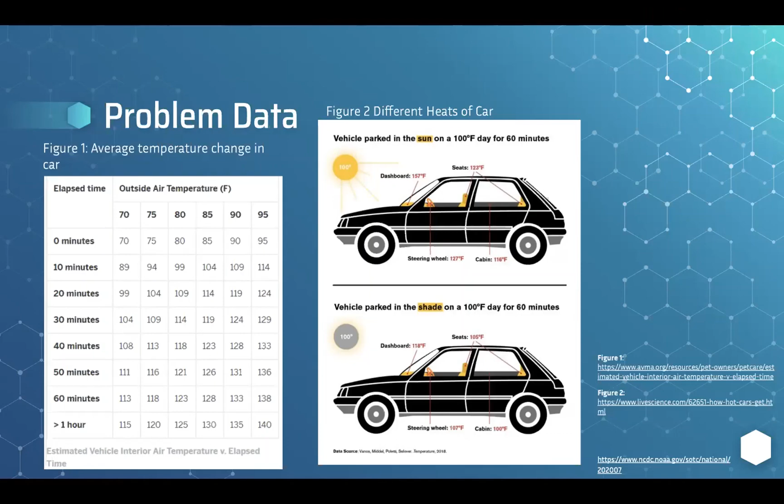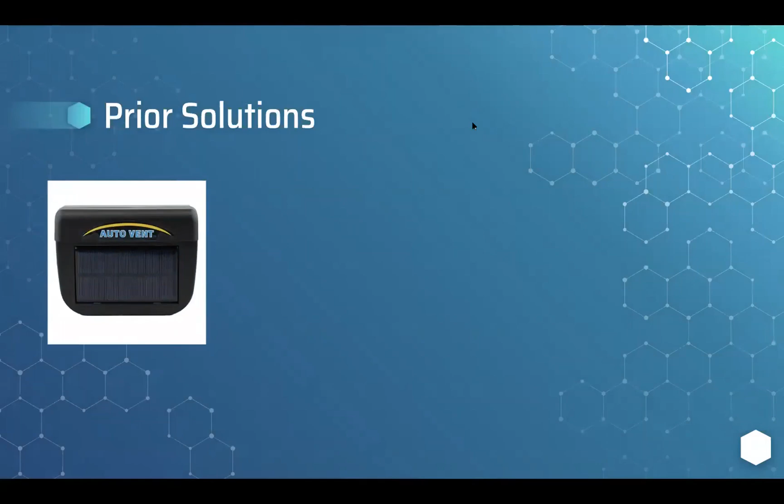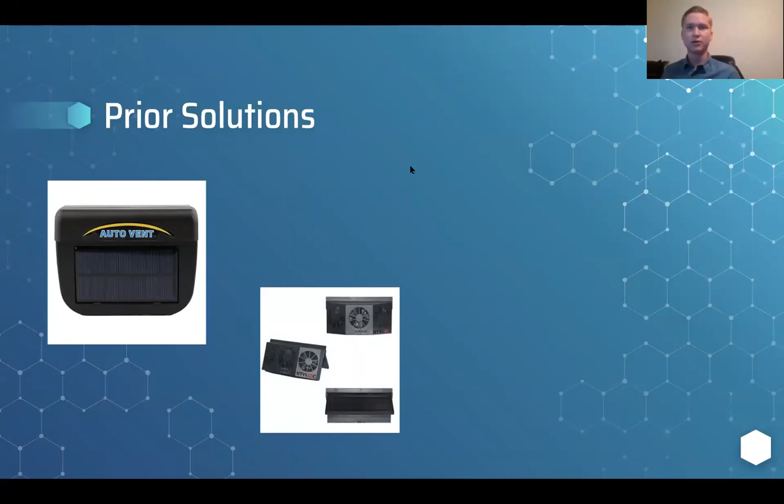These are some of the solutions we could find. The AutoVent is a solar-powered fan that you can hang from the window, meaning that you have to leave the window cracked, which could lead to someone breaking into your car. And also the fans were not powerful enough to actually cool the car down. Similar to this product is the USB powered car ventilator. This device also has the same problem. The car cannot get cooled down enough, even with the 3 fans. And you also have to leave the window cracked as well.

The Sunshade is a pretty good product to keep the sun out of the car, but the problem is it only blocks the sun from the front of the car, not the side or the back, meaning that the sides of your car can still heat up. The Lombo is a great product that works really well, easy to set up, and it keeps the car cool, but it's around $400, so it's not very affordable, and it's also not very convenient to take to work.

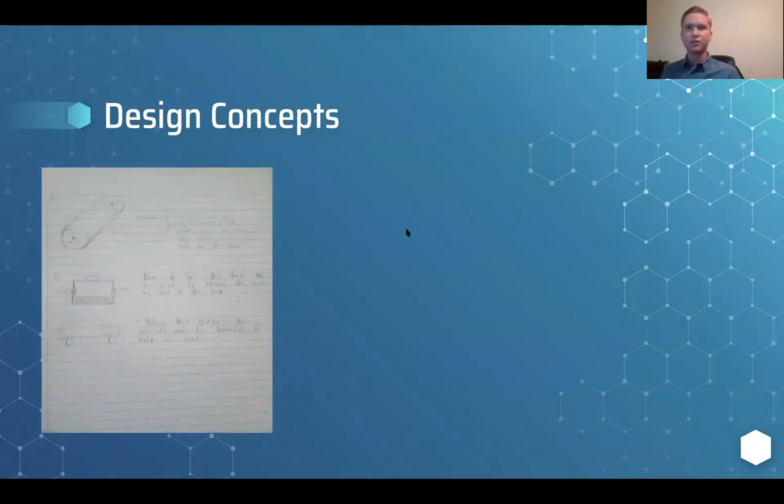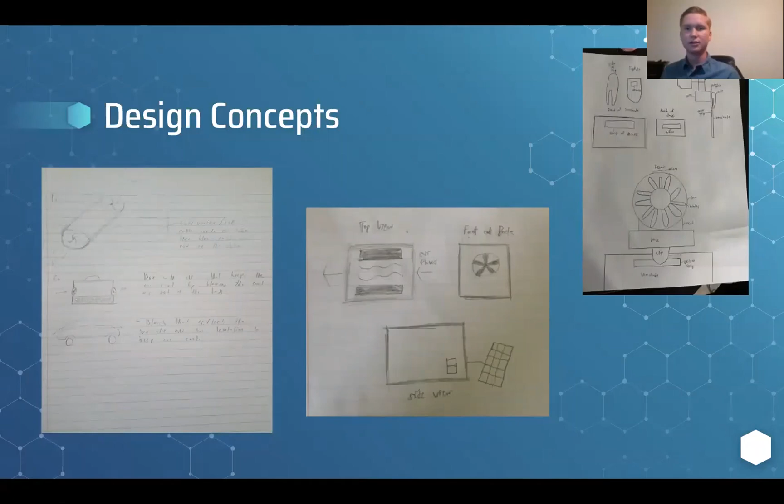We decided that the tube fan design was the best idea. The design has 2 tubes, one that is bigger and is made out of 4-inch PVC pipe, and one that is smaller and is made out of 1.5-inch aluminum pipe. The design has 2 fans, one that blows air into the tube and one that blows air out of the tube. There is a gap between the tubes in order to keep the gel packs inside. The packs cool the smaller aluminum tube, which will cool the car once the air is blown out of the tube. And then the PVC pipe holds the gel packs in place and acts as insulation for the design.

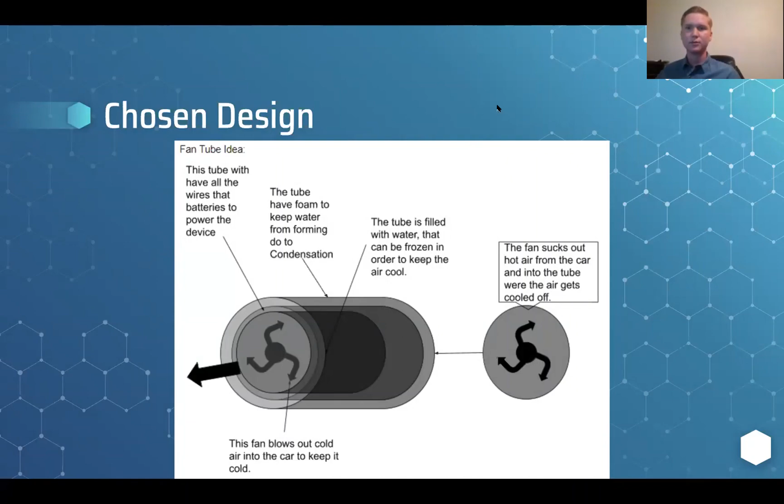Here are some principles that were applied to our project. To begin, we did research on the heat capacity of different materials that we were planning on using to put inside the PVC pipe. We ended up choosing an aluminum pipe because of its low heat capacity, along with it being within our budget. The second thing that we did was also research the heat capacity of liquids that we're trying to use to put in between the two tubes. However, we also wanted to make sure we picked the best material here that would last the longest.

So we did an experiment where we grabbed 4 different solutions, one being just plain water, 2 being antifreeze solutions, with one being 50% antifreeze, 50% water, and another one being 70% antifreeze, 30% water. And the last solution was this plastic marble gel that is used in Blue Apron cool packs. We threw all 4 solutions in the freezer, froze them overnight, and took them out and measured them over a 2-hour stretch to see which one will last the longest. As you can see in the data, the plastic marble gel lasts the longest, and we decided to use that for our ice.

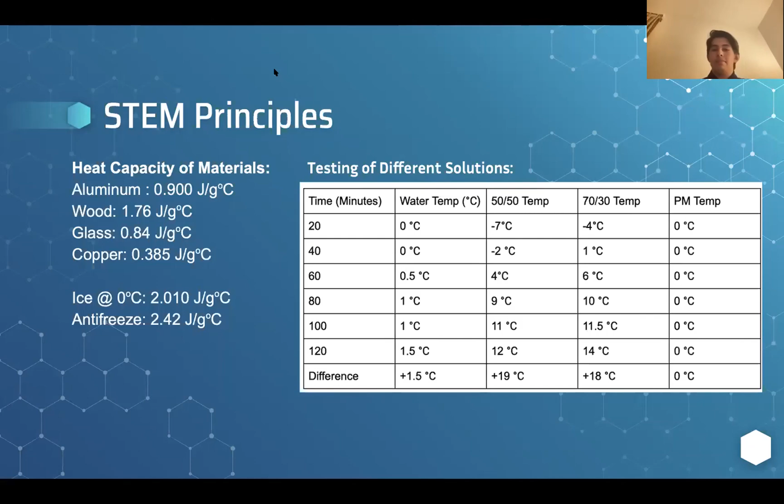We also had to get the gel packs into little plastic baggies in order to enable them to fit in the two pipes. We also had to freeze them at an angle so they would fit. We also had to cut our PVC pipe the same length as the aluminum pipe. And the last thing that we did was setting up and coding an Arduino to run the fans when the temperature sensor reads 32 degrees Celsius or 89.6 degrees Fahrenheit.

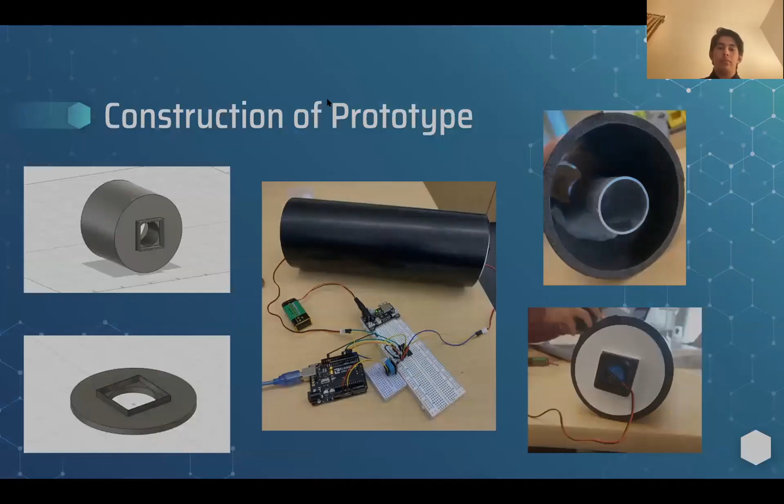Our design specifications and the test results for each design spec. For our first design specification, we wanted to cool the car off to 90 degrees Fahrenheit. For this test, we just threw our device in a car and had a LabQuest record the temperature throughout an hour test. As you can see from our data, it did keep the car underneath 90 at several different time intervals. This is because we programmed our Arduino to run the fans when it is above 89.6 degrees Fahrenheit.

And it will run it for 10 minutes straight. After 10 minutes, it will once again read the temperature sensor to see if it is above that mark. If it is, then it keeps the fans going. If not, then it turns off the fans. We did this to save battery power, so the fans weren't constantly running. And obviously, as you can see in the data, it did work.

We started with 97.3 degrees in the car, and it dropped all the way to 91.8 after 10 minutes. And then since the temperature was still above 90, we kept it going for another 10 minutes. And after 10 minutes, it was at 85.9, so the fans automatically stopped. Sorry?

Anyway, at the time mark 20 minutes, it was at 85.9 degrees, so the fans turned off, and the car began to heat up again. As you can see in the graph, there's a slow decrease in temperature throughout the first 20 minutes, and then a sudden rise because the car was able to heat up. However, since we did keep the car underneath 90 degrees Fahrenheit, we do believe we met this design spec.

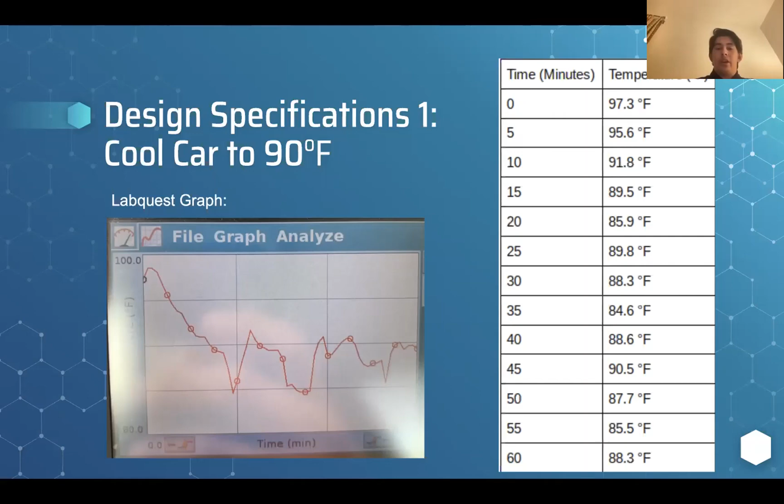All right, for the second design specification, we wanted a standalone power supply. For this, we wanted it to be independent from the car because it would drain the car battery if it was not. So we were going to do solar power, but we decided on 2 rechargeable 9-volt batteries because our design lasted 6.5 hours with the fans constantly running with those 2 batteries. Although our fan is not meant to run constantly for 6.5 hours, because the fans will only turn on when the temperature is more than 90 degrees. With the 2 rechargeable batteries, we met this design spec.

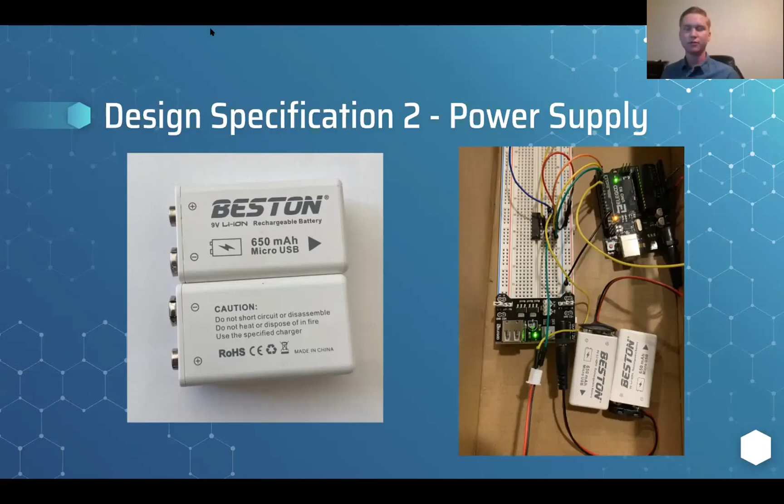The third design spec is usable on all kinds of vehicles with roofs. The reason that this design wouldn't work with cars without roofs is because the cool air would escape and therefore not cool the car off. So the design is small enough to fit in all vehicles, and can be placed almost anywhere in the car, on the floor, in the seat, or in the center console.

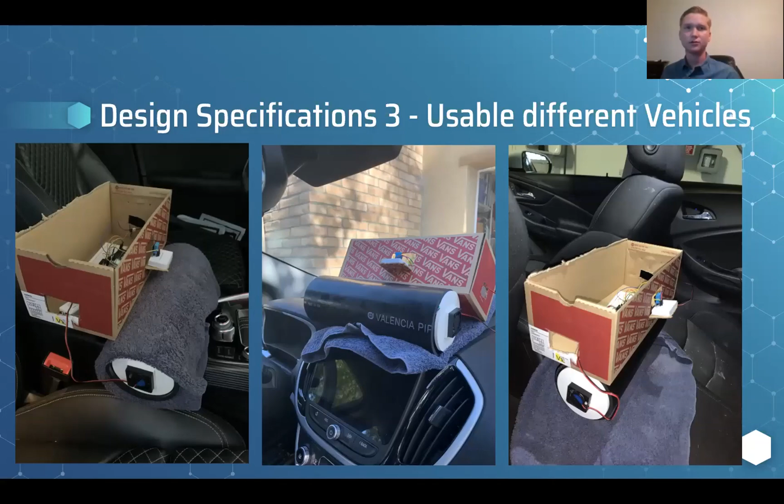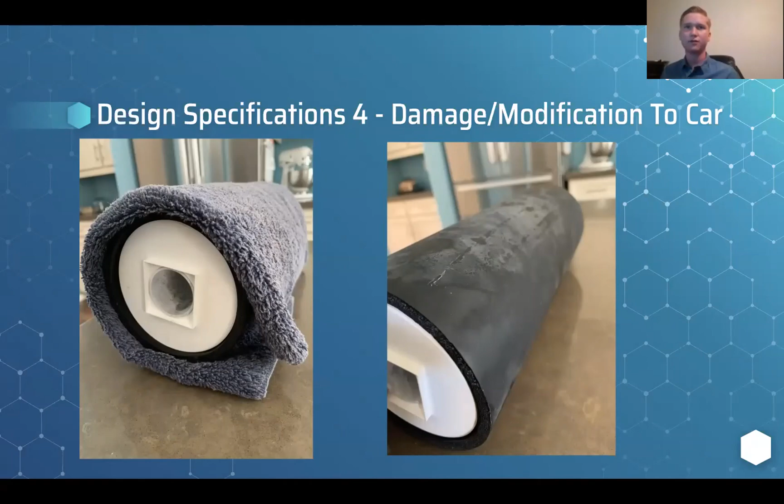The fourth design specification is it won't permanently damage or modify the vehicle. The reason behind this design specification is because it would lower the price to sell it in the future if you modify or damage a car. And then we took into account condensation could damage the car, so we added a towel to prevent that. Since our design can be placed almost anywhere in the vehicle without having to modify or damage it, we met this design requirement.

Our fifth design specification was to make the device portable. We specified this as a device that has a maximum of 30 pounds and can be carried from car to car. We had our tester carry the device to his car, and he was easily able to carry both components, one in each hand, to his car. As seen in the first two images, the combined weight of both parts is about 4 pounds.

We added in the weight in grams and then converted it to pounds, as it is difficult to see the scale. Some of the designs in a prior solution, such as the auto vent, were much smaller and could fit into your pocket, but were much less effective. The Ice Tornado meets this design specification as its weight is under 30 pounds and it can easily be transferred from car to car.

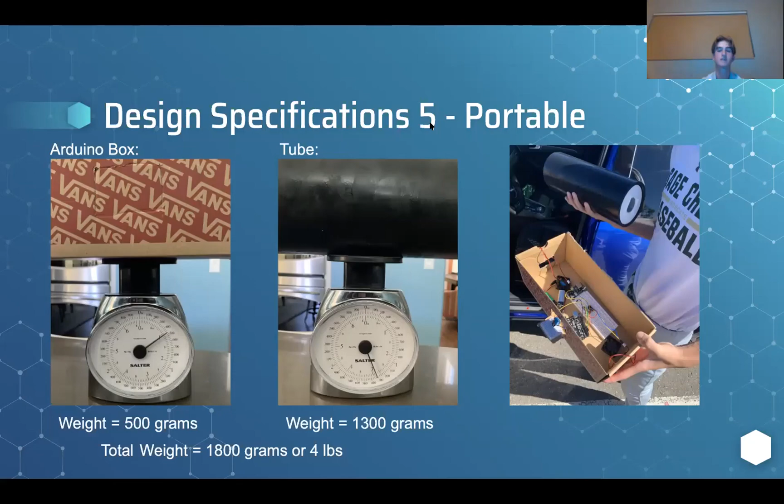Our sixth design specification was to have the setup quick for day-to-day use. We set a time constraint as a maximum of 30 seconds to fully set up the device. As shown in the diagram, the 4 test subjects set up the device in under 30 seconds. Coach Guy Sabala is seen in the video, and he fully set up the device in 27 seconds.

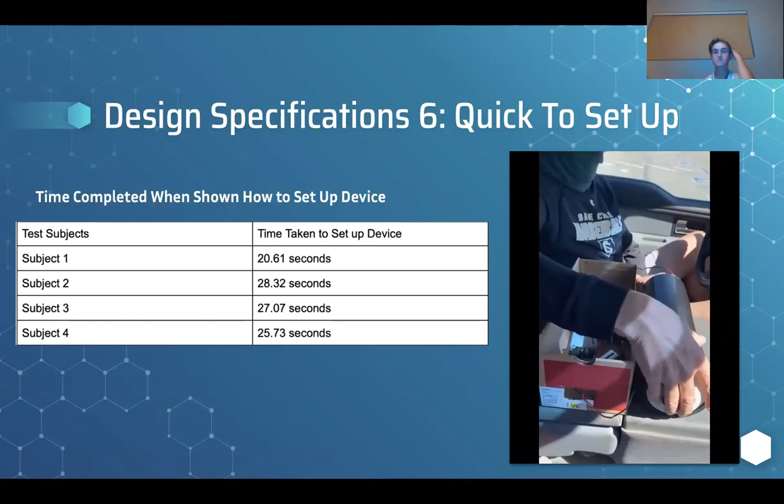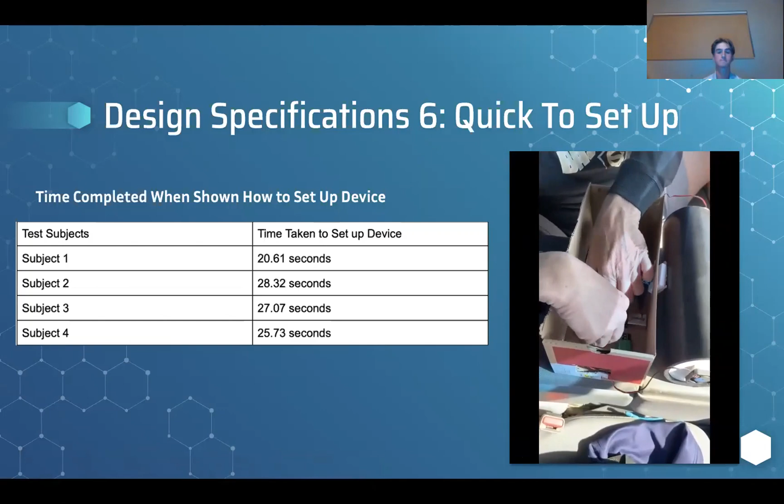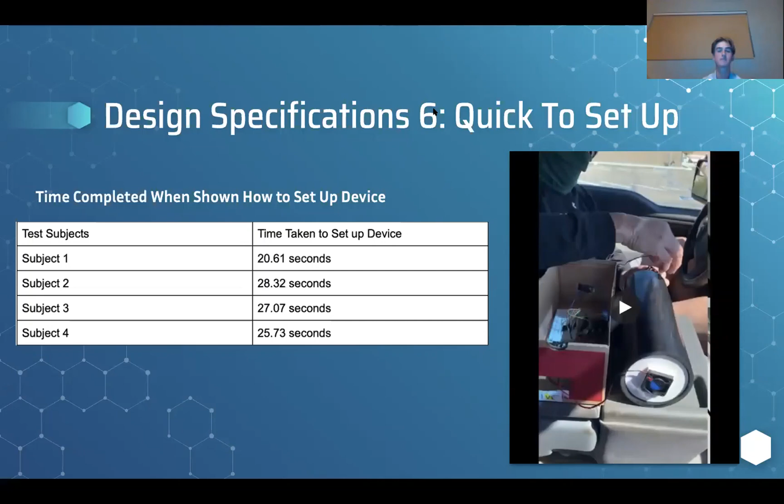These tests were done with simple instructions on how to set up the device, as there would be an instruction manual in any final model. The tests we have done on the device have all been under simple instructions and have all been less than 30 seconds, so we have met the criteria for this design specification.

For our seventh design specification, we want to test the usability. We want there to be usability within our device, and to keep the device within 4 buttons to start. However, there are no buttons to start the device, but steps one will have to do in order to set up and start the device. We were unsure how to test this part of our design, so we consulted our engineers, and they told us to give our device to someone and have them figure it out without telling them what to do.

This is very similar to our test in our 6th design spec, but in those we showed the person how to set up the device. Here we just gave it to someone and had them figure it out. We gave it to 4 people, and all of them were able to figure it out, taking only 10 seconds longer than in the 6th design spec test. So therefore, we believe this was met.

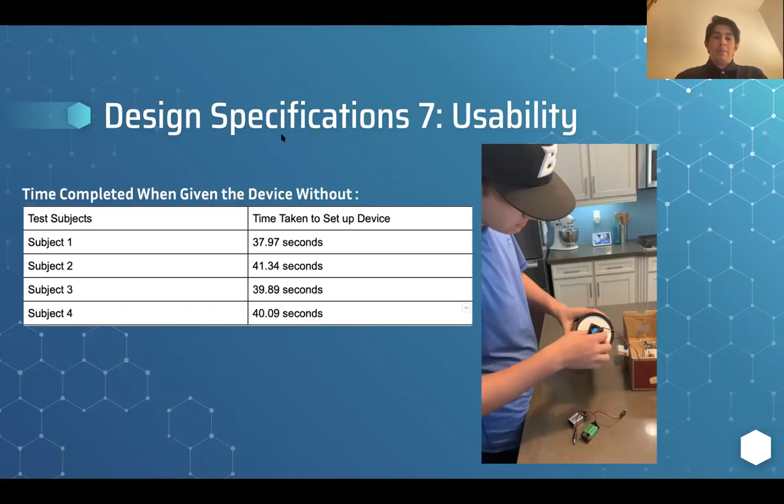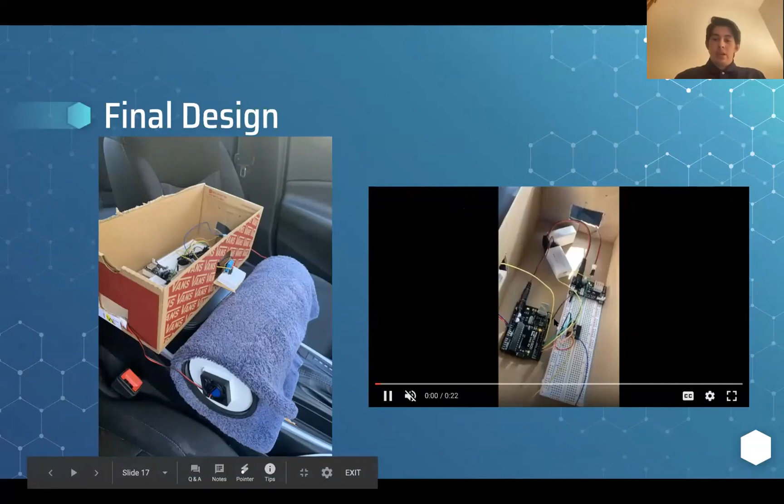This is our device working. As you can see, the temperature sensor is out and is currently reading over 32 degrees Celsius. Both fans are currently on. And see one side. As we go to the other side, you will also notice the fans are pointing in the same direction. That way, the airflow in the aluminum tube is going the same direction.

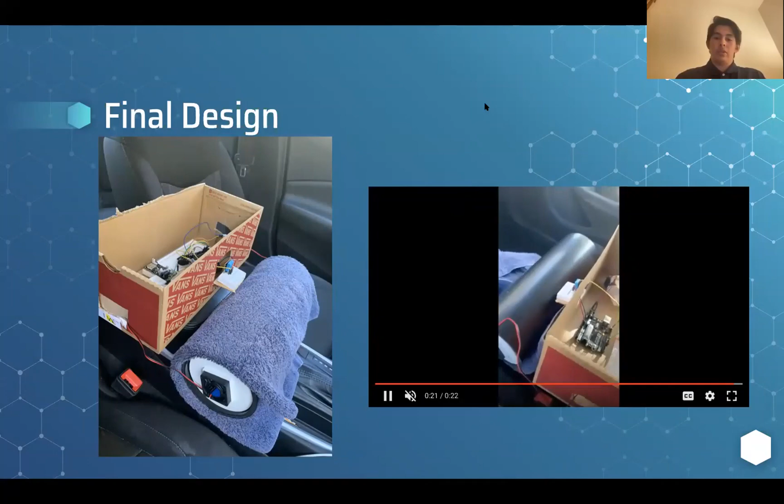After all of the testing and the results we found, there are a few changes we would make in the future. First off, we would like to add a fitted towel that you could slide onto the Ice Tornado every morning. A fitted towel will absorb any condensation that would develop on the outside of the device. We would also like to improve upon the batteries used.

For the batteries, we would want batteries that will last longer than 6.5 hours. We'd want them to last ideally 8 hours for a full workday. But for the test, the device ran continuously, so that's why they only lasted 6.5 hours. It would be ideal to have a battery that could last the full 8-hour workday running continuously.

We would also want to direct more power to the fans, which we could have by using a different set of fans or by having more powerful batteries. Lastly, we would like to add in a stand that you could set the device on, and it will stay steady in the position you choose to put it in.

We would like to thank everyone who helped us bring this project to fruition, especially Mr. Steckman, who was our mentor throughout this project, and the Carlsbad Educational Foundation.